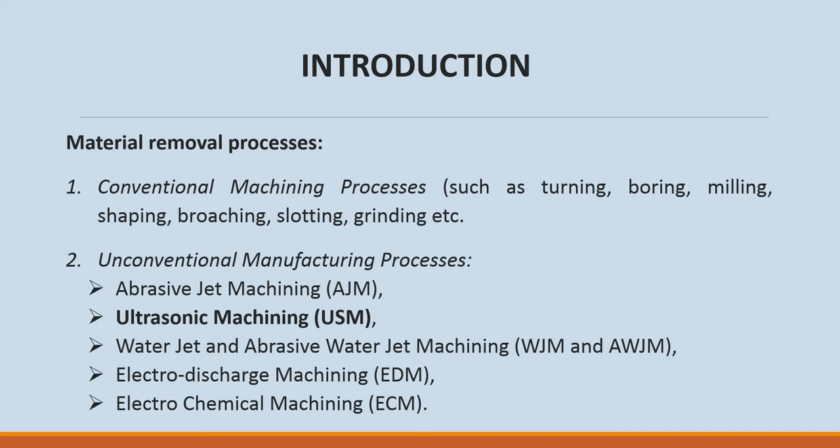As you know, materials and processes are divided into two groups, conventional and unconventional. Ultrasonic machining is an unconventional machining and manufacturing process. In this process, the material of the workpiece is removed by the repetitive impact action of abrasive particles. The erosion takes place by the abrasive particles, which are carried by a liquid medium in the form of slurry. The shaped vibrating tool is used to produce the impact, as you can see from the figure.

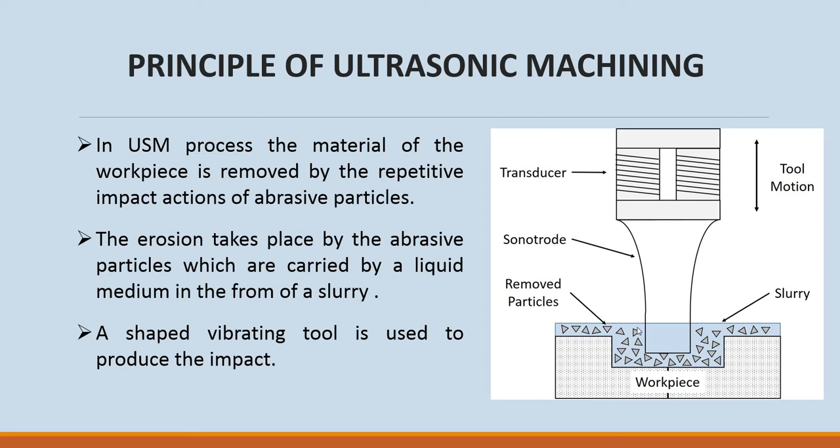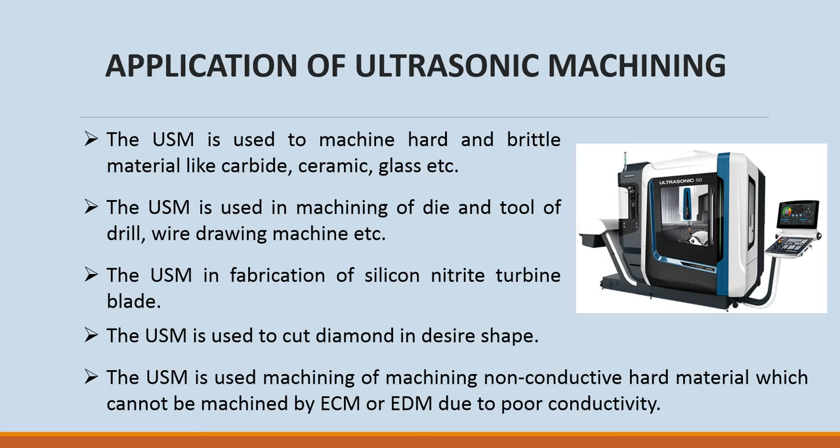Ultrasonic machining has a lot of applications for machining hard and brittle materials, for machining of die and tool of drill, to fabricate silicon nitride turbine blade, and it is used to cut diamond in desired shape, and so on. The main criteria for this process is material removal rate, geometrical accuracy, surface finish, tool life, and consumed power.

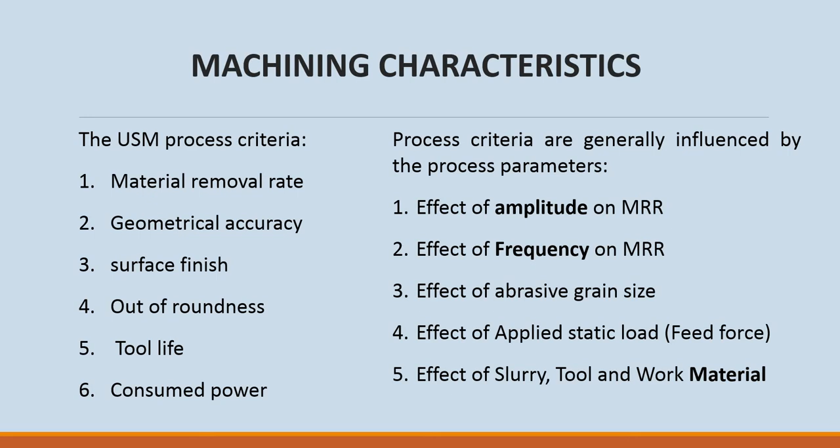This criteria affects the amplitude, frequency, abrasive grain size, and applied static load, and material for tool, work, and slurry.

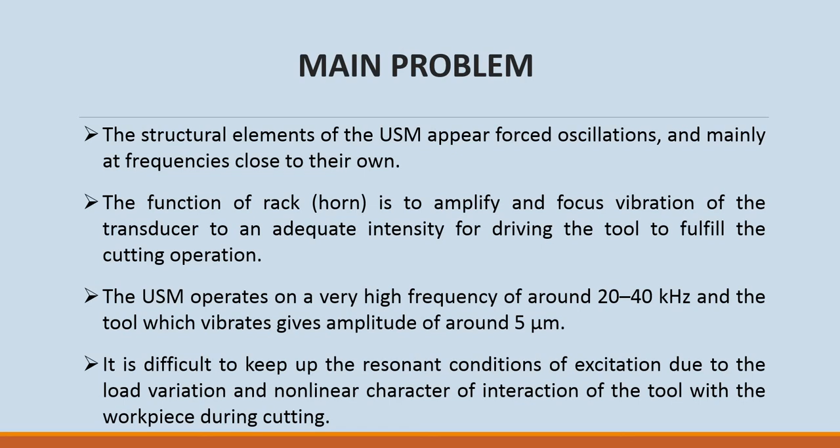All the subject of the ultrasonic machine is subject to vibration, and this vibration is between 20 to 40 kilohertz, and the tool vibrates with an amplitude of around 5 micrometers.

The magnification factor for the amplitude of vibration is dependent on the design of the ultrasonic rack, and the damping characteristic of the system is a main parameter that affects the amplitude and frequency of the system.

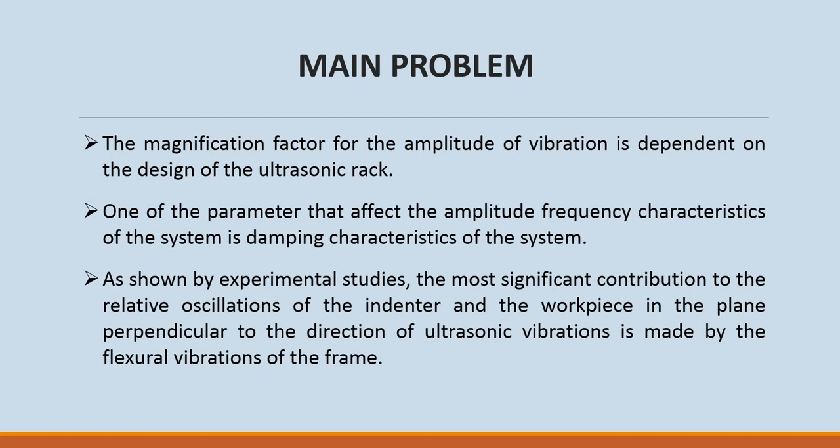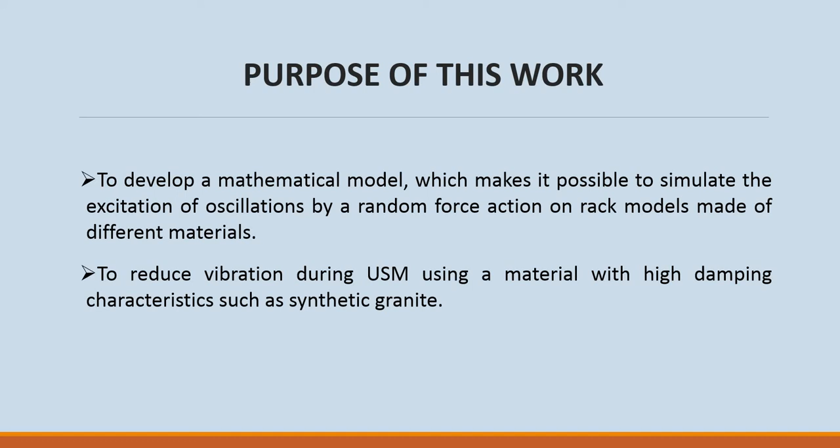So the purpose of our work is to develop a mathematical model which makes it possible to simulate the excitation of oscillation by a random force acting on a rack made of different materials, to reduce vibration during USM using material with high damping capacity such as synthetic granite.

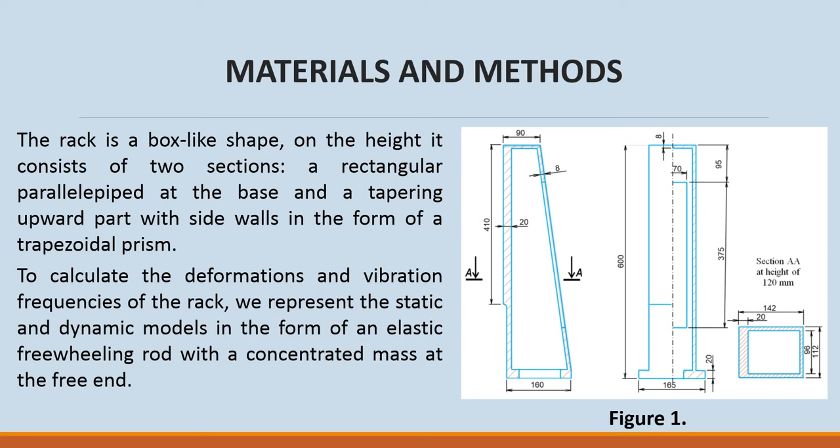As you can see from the figure, the rack is box-like in shape, and on the height it consists of two sections. To calculate the deformation and vibration frequency of the rack, we represent the static and dynamic models in the form of an elastic freewheeling rod with a concentrated mass at the free end.

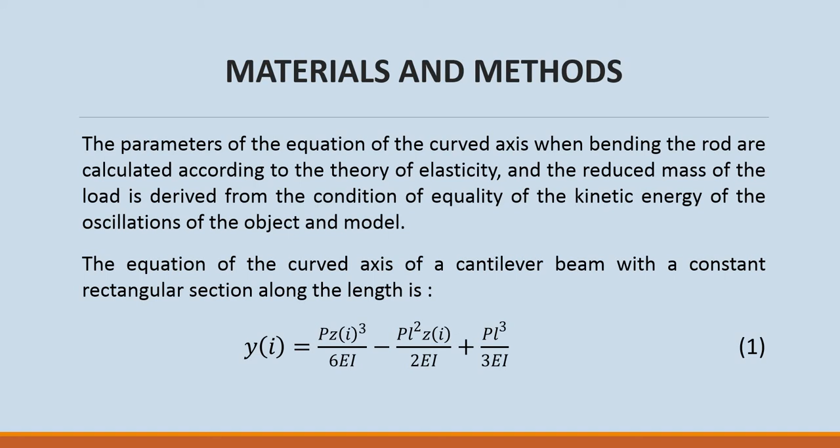We use the theory of elasticity. So we use equation 1 to calculate the curved axis of a cantilever beam with a constant rectangular section, and we apply this equation to a hollow section beam of trapezoidal shape, with variable moment of inertia along its length.

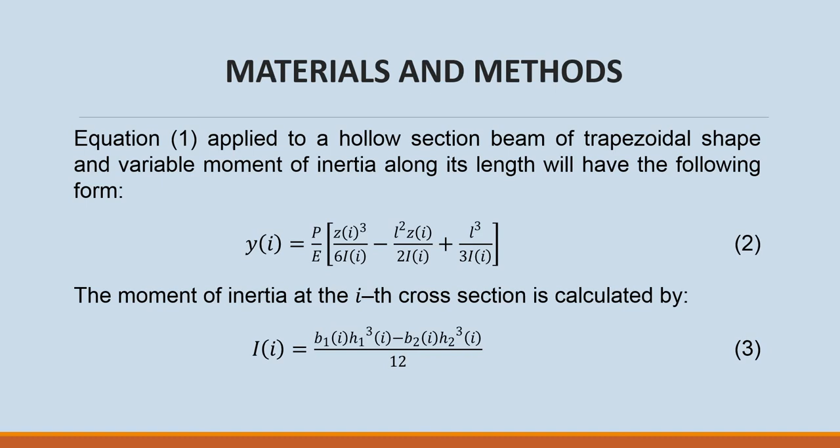I mean equation 2 and equation 3. Theoretical analysis of the frame oscillation is greatly simplified if we consider only the vibration modes corresponding to the first harmonics of the natural oscillation spectrum, since it is on this harmonic that the greatest oscillation amplitudes are observed.

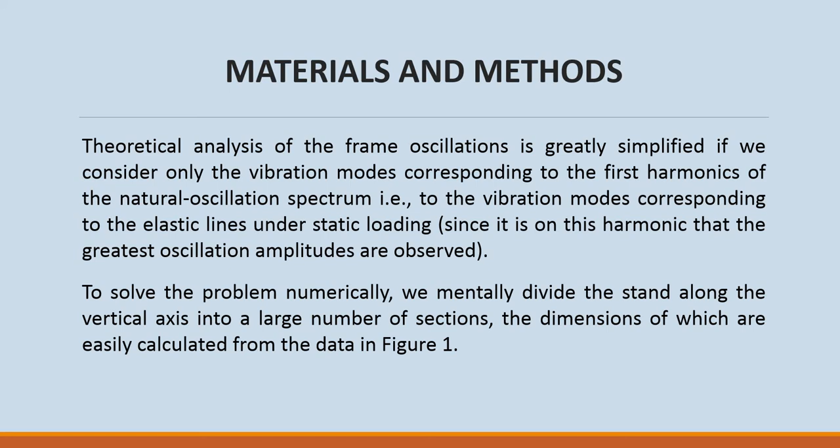To solve the problem numerically, we mentally divide the stand along the vertical axis into a large number of sections, the dimensions of which are easily calculated from the data in figure 1. So we achieve the reduced mass of the model under bending.

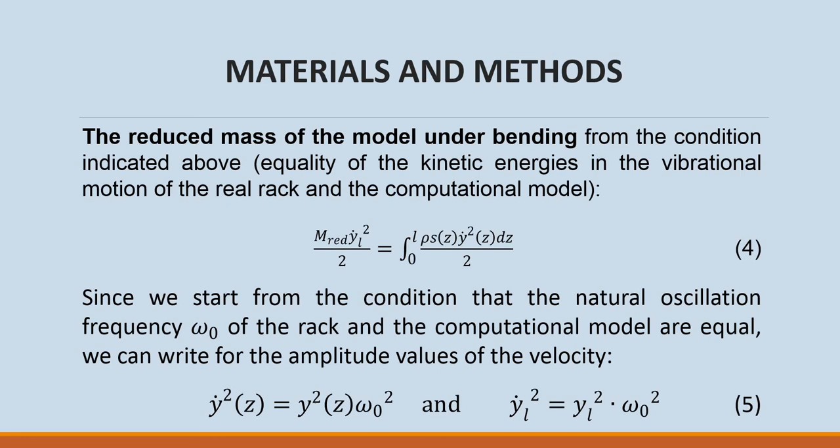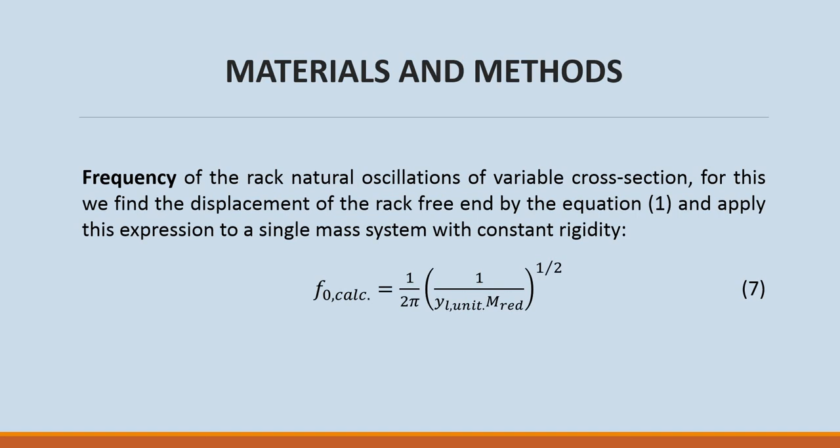Since we start from the condition that the natural oscillation frequency of the rack and the computational model are equal, we can write the equation 5 for the amplitude values of the velocity. We substitute equation 5 into 4, and we get equation 6, and at the end we get the frequency of the rack's natural oscillation of variable cross section.

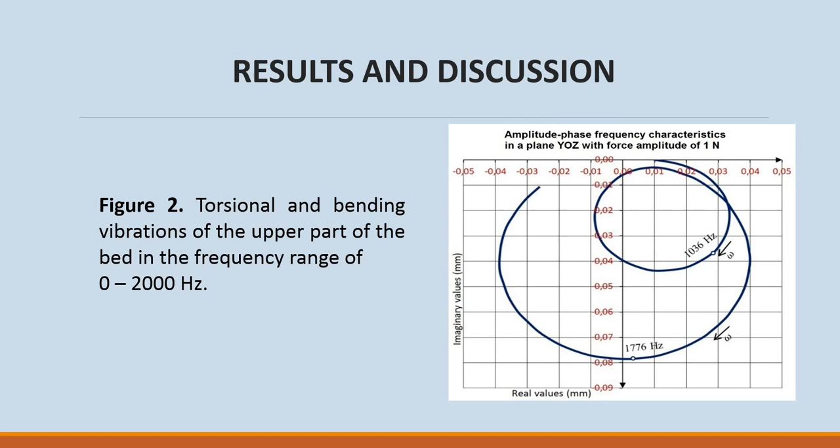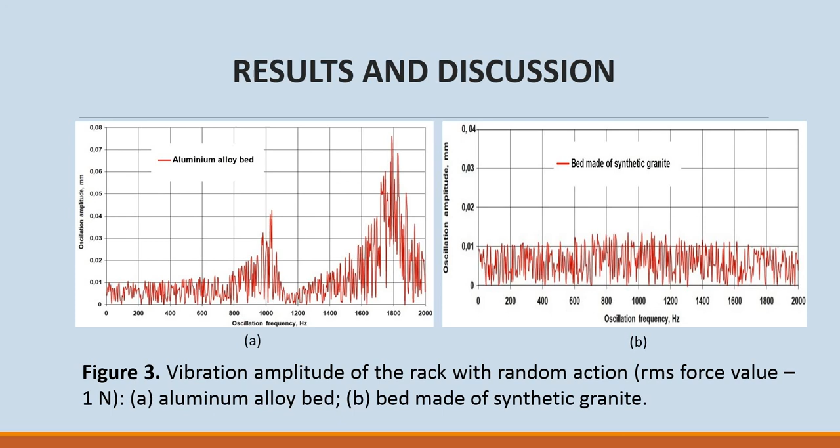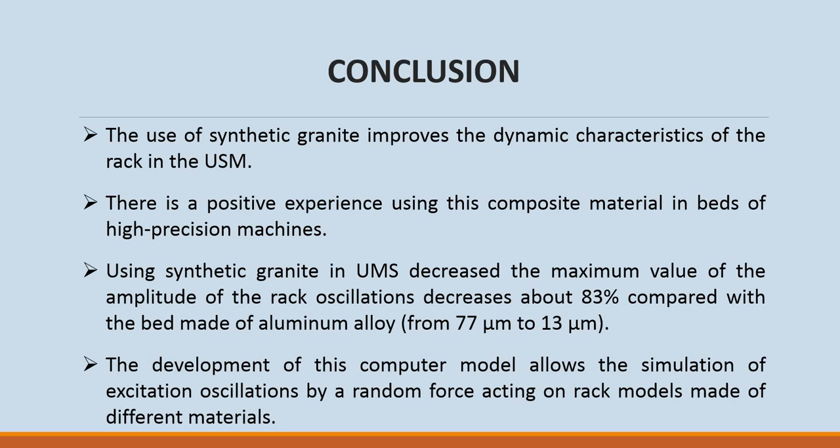As a conclusion, the synthetic granite has decreased the vibration amplitude by about 83%, from 77 micrometers to 13 micrometers, and the development of this computer model allows the simulation of the excitation oscillation by a random force acting on rack models made of different materials.